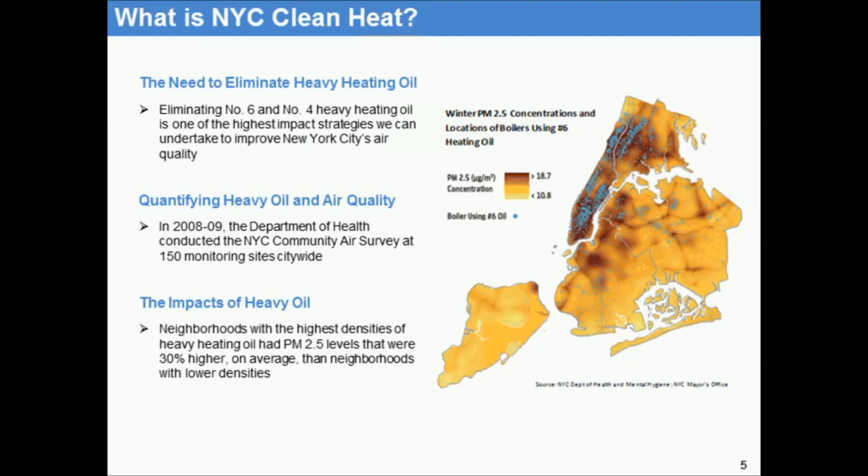And then, of course, the impacts of the heavy oil. The neighborhoods with the highest densities of heavy heating oil had PM 2.5 levels that were 30% higher on average than neighborhoods with lower densities. There is quite a difference. The problem: fine particulate matter emissions, PM 2.5, are a leading public health threat in New York City. This whole program is based on health and cleaning the air, making it easier for us to breathe and live and play.

Annually it is responsible for about 3,000 deaths, 2,000 hospitalizations, and about 6,000 ER visits for asthma. And although 1% of New York City buildings burn heavy heating oil, which is number 4 and number 6, this equates to more soot pollution than all of New York City's cars and trucks combined. So visualize taking all the cars and trucks off the street, and that's what you'd be reducing the emissions by.

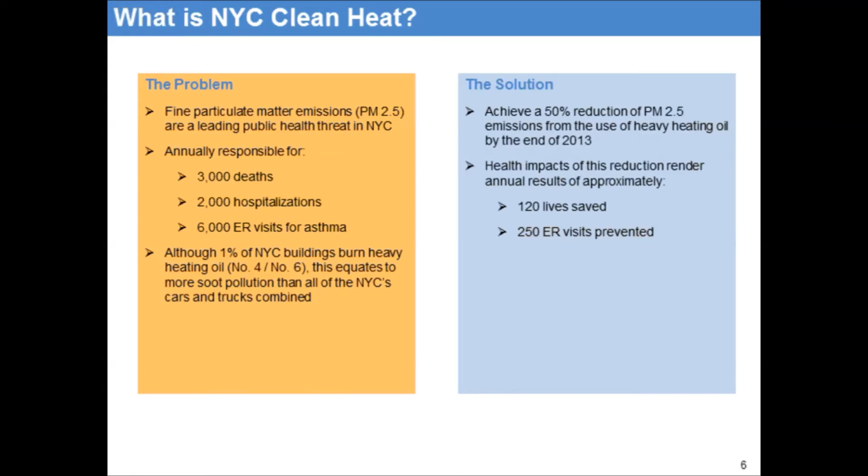What's the solution? Achieve a 50% reduction of PM 2.5 emissions from the use of heavy heating oil by the end of 2013. That would be our main goal. Health impacts of this reduction render annual results of approximately 120 lives saved and 250 ER visits prevented. Our goal: to reduce the fine particulate matter emissions from the use of heavy heating oils by 50% by year end of 2013. How can you help?

Convert your number 4 and number 6 burning building to the cleanest heating fuel available to you, which are ultra-low sulfur number 2, natural gas, biodiesel, or steam. Program progress: buildings participating in New York City Clean Heat have already reduced PM emissions by over 72 metric tons from our goal of 370 metric tons.

To the right, you'll see what our projected participation is and where we are as far as our goal. We've identified certain levels of activity with different shades: complete, in construction, and inquiry. So we have a lot of work to do. And this area here that's been identified is what we need to change.

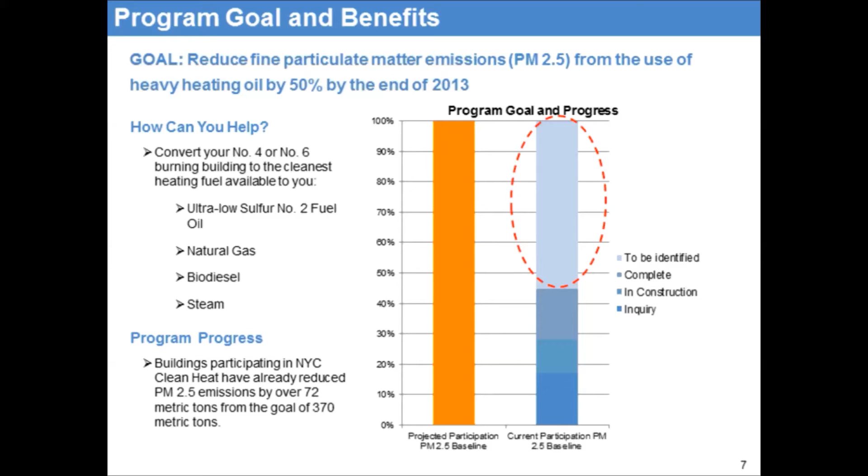Technical assistance. New York City Clean Heat has hired a staff, and we're available to guide buildings through the conversion process. New York City Clean Heat is working closely with utilities and industry leaders to help buildings save money and convert to the cleanest fuels.

Within our website, which is nyc.gov/cleanheat, you can learn more about health impacts of heavy oil, clean conversion options, the conversion process, and when your building must convert, and more. Again, here's our email address and phone number.

And something about our website, which is really interesting, is this feature: spot the soot. You can actually identify your building as a building that's burning number 6. And what would be very interesting and very nice to know is that when you do convert, your dot comes off the map. So you're no longer identified as a building that is burning heavy heating oil.

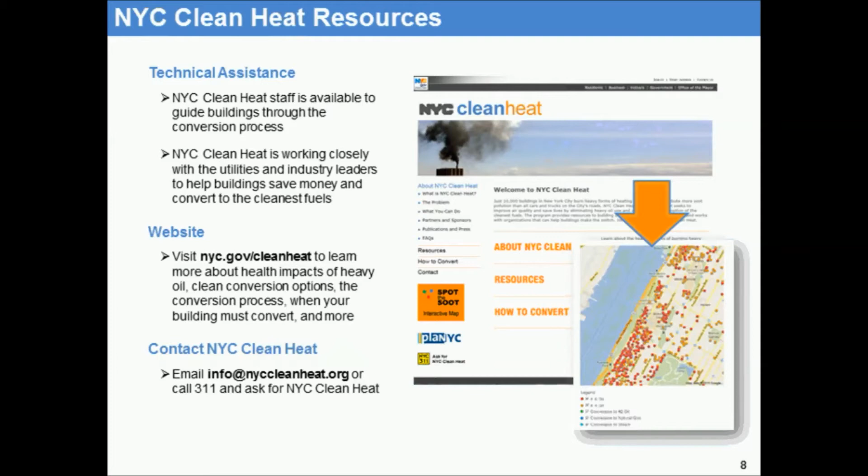Timeline. Back in 2007, Mayor Bloomberg launched PlaNYC, including ambitious air pollution goals. April 2011, New York City Department of Environmental Protection passed regulation phasing out number 6 fuel oil and number 4 fuel oil. As you can see, by July 1st, 2015, no more number 6 will be able to be burned or permitted to be burned, and number 4 fuel oil by July 1st, 2030.

In June of 2012, Mayor Bloomberg made an announcement at a press conference in the Bronx, which launched the program full-fledged. July 1st, 2012 to July 1st, 2015, buildings would no longer be able to permit for number 6 with DEP as the triennial certificates of operation expire.

Any building that's burning number 6 or any fuel has to go for permits, certificates of operation. DEP will no longer accept number 6 fuel oil permits after 2012. And of course, by 2015, everybody who has been permitted for number 6 will have to be off of number 6. And July 1st, 2030, all buildings must burn one of the cleanest heating fuels.

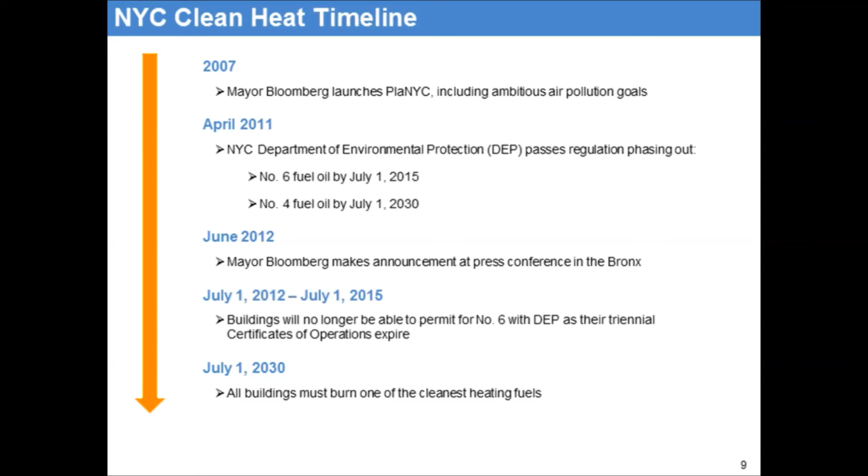In April of 2011, DEP finalized regulations that would eliminate heavy oil use in 2 phases to balance near-term health benefits with cost minimization for buildings. Phase 1, as of July 1st, DEP will no longer approve certificates of operation for number 6 fuel oil. And as these permits must be renewed every 3 years, number 6 fuel oil will be completely eliminated by 2015.

In Phase 2, all buildings must convert to the cleanest fuels by 2030, or when replacing the boiler burner, whichever happens sooner. This is very, very important, and I know a lot of people don't understand this regulation. The feeling is that the quick fix to get off of number 6 is to go to number 4.

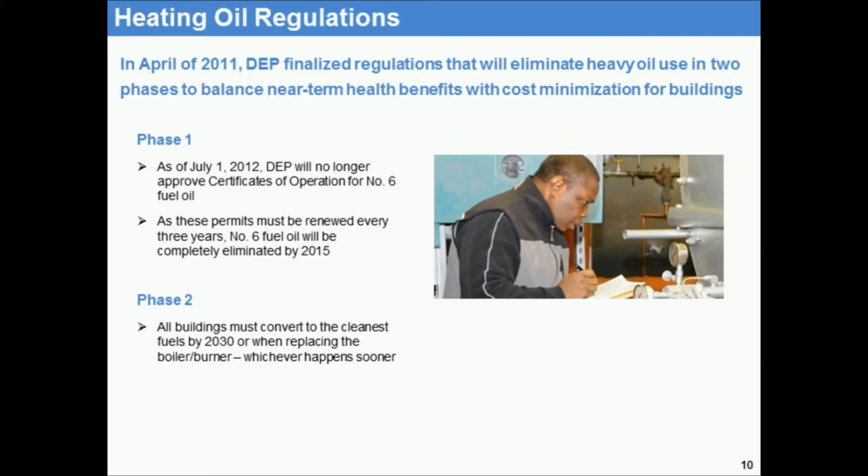But if something occurs in the building's heating systems where a permit is required, the Department of Buildings will tell that building to go straight to number 2 and will not allow that building to go to number 4. So when making the choice, please consider the fact that you may have to end up doing it twice in the very near term. This is why it's very important to reach out to New York City Clean Heat and speak with one of the account managers that are working with the buildings.

Target fuels. Ultra-low sulfur number 2 fuel oil. As you can see from the picture, if you look really closely, you'll see that number 6 is totally opaque. You can't even see through it. Where number 4, you could start to see the vial, and of course number 2 is clear. Number 6 is basically the bottom of the barrel sludge. It needs to be heated in order for it to be moved.

Where number 4 is a mixture of 6 and 2, and the ratios vary from 80-20, 60-40, where the higher number is the number 6 component. So that enables the number 2 to sort of dilute the number 6 portion of the fuel oil.

The ultra-low sulfur number 2 fuel oil sulfur emissions have dropped from 2,000 to 15 ppm. And that was due also to a different way of manufacturing the number 2 and also the addition of a biodiesel mix. It burns over 90% cleaner than number 4 and number 6 fuel oils. It reduces maintenance because it's so much cleaner.

And the fuel prices across number 6, 4, and 2 have been flattening out over the past years. Very important to, again, realize this when making that choice of going to number 4 or number 2. The biodiesel blend can make it an even cleaner and cheaper fuel with additional tax credits.

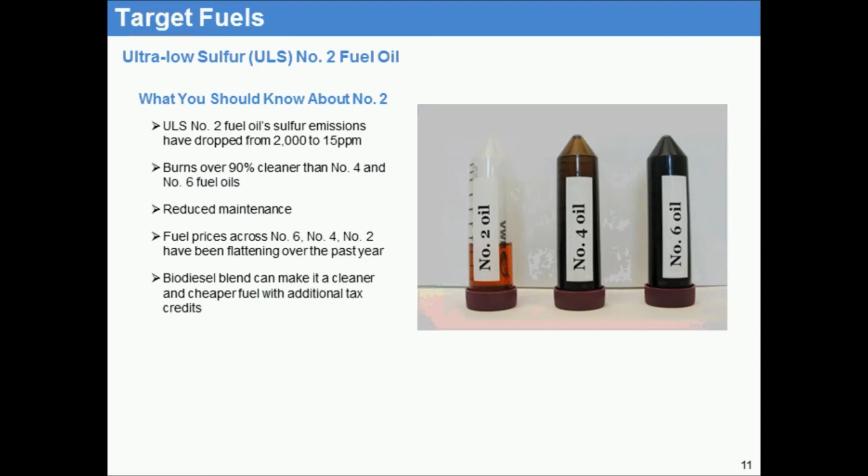Natural gas. What you should know about natural gas. Con Edison and National Grid serve the 5 boroughs in New York City. Low commodity prices encourage a quick payback, but the Con Edison infrastructure, along with National Grid infrastructure, limits availability. Work with the Clean Heat staff to assist in mitigating upfront requests by utilities for required infrastructure upgrades.

Plan your other local law projects as far as your conversions go: scaffolding, greener, greater building information required, etc. Very important to know that once the scaffolding is up, it will hinder Con Edison's ability to install the service if one has been scheduled to be installed. So it's very important to work all of your projects with Con Edison and also with Clean Heat.

Steps to conversion. First step, assess your target fuel. Look at the Con Edison website to see if your building is listed as no cost. Contact the New York City Clean Heat program for assistance. Second, obtain internal conversion costs. Work with a contractor, engineer, or plumber. Third, obtain necessary permits through the New York City Department of Environmental Protection and/or the Department of Buildings.

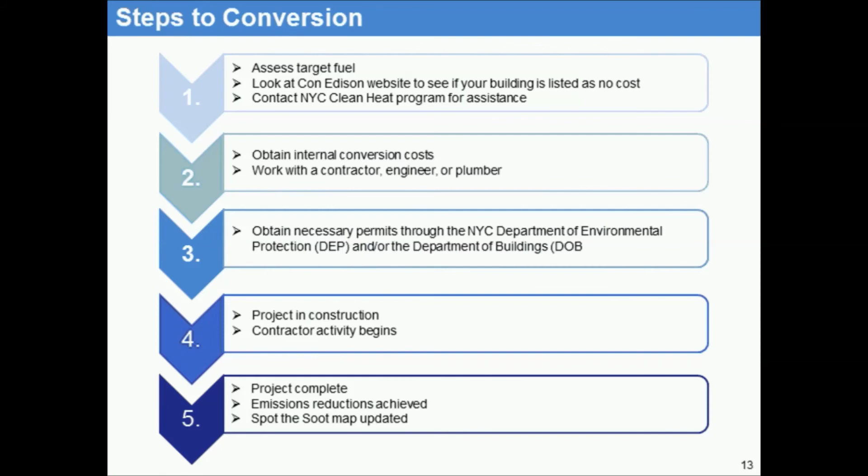4, project in construction. Contractor activity begins. And 5, project complete. Emission reductions achieved and the spot the soot map updated. It would be very nice to have all those buildings off that spot the soot map.

Conversion timeline. Converting to ultra low sulfur number 2. As you can see, these are not finalized timelines, but just to give everybody a feel for what it would take as far as time goes. Obviously, as you take your steps through the process, you'll see that it could be a 4 to 6 week conversion. And when you do notify Clean Heat, we can help assess your project, connect you to any needed resources, and ensure that your conversion is reflected on the spot the soot map. Very important to identify the proper steps.

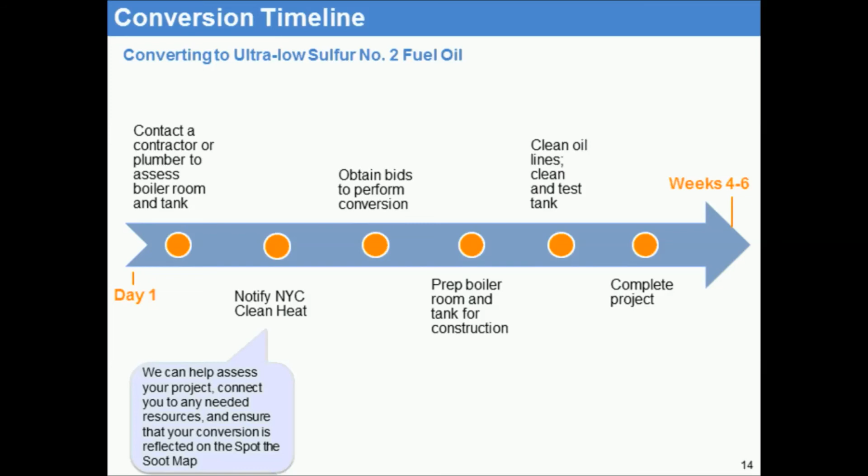Converting to natural gas. You can see here that the process is a lot longer. What's important about this slide is that it shows the different steps. And if your triennial is coming up and you're running out of time, you need to know that you have to leave yourself at least 9 months worth of time for you to plan, apply for permits, solicit bids, address all the utility requests, and then complete your construction.

And in this specific spot, it's a crucial step to ensure that you are made aware of all the natural gas connection opportunities. We work with the utilities closely, as I mentioned earlier, so it's very important to reach out to us. It allows us to update our data as to the proposed particulate matter reduction, and it allows us to talk to you about what would be available as far as natural gas infrastructure and capacity.